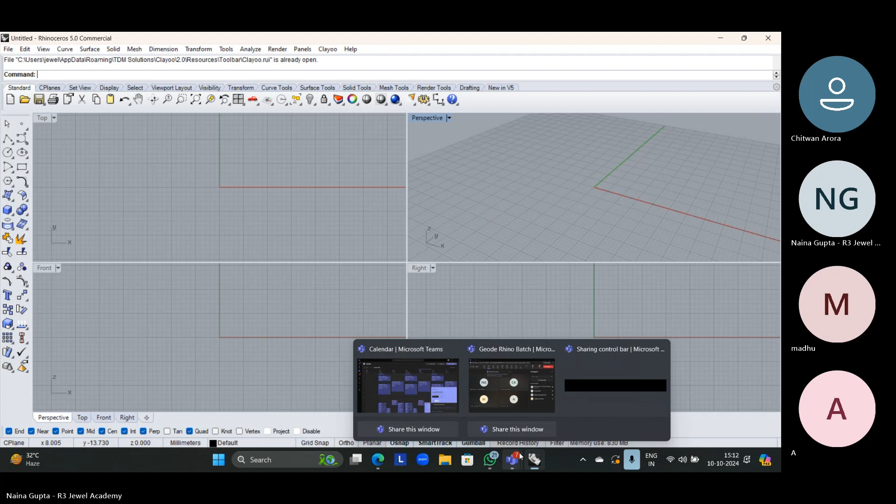Madhu, can you understand English properly or Hindi? Madhu. Hello, hello Madhu, madam. I'm talking to you on phone, can you hear me? Can you see my screen? You can understand English properly? I can teach you either in English or Hindi, so you can understand Hindi or English? Madhu, can you please speak?

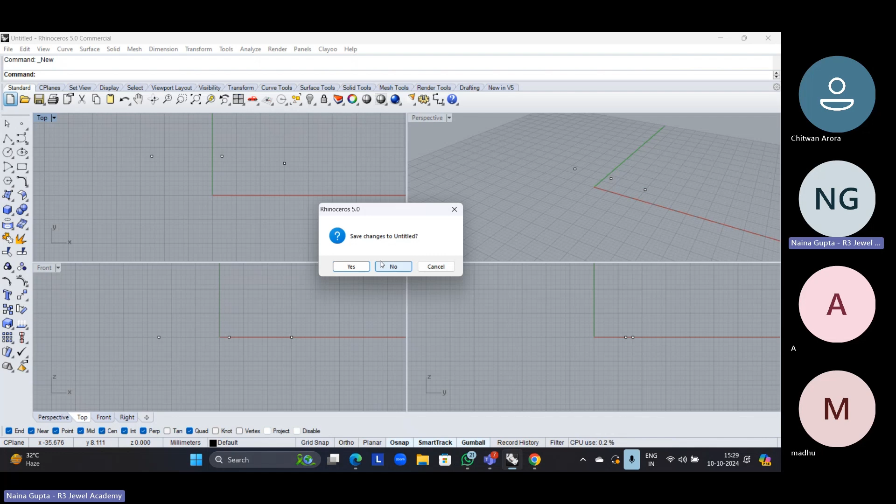But if you click on yes, then it will ask where you want to save this file or what name you want to give it. Suppose I want to save this file on my desktop, then with name 1, 2, 3. Save as type, you don't have to change it. Okay, and save. So now because we clicked on new file, it will open a new file.

So it's asking which unit you want to open. We work only in millimeter, so select millimeter and open.

Clear? Okay, now before when I showed you, there was only 5 boxes in one big box, right? Now this is 10. So when you open a new file from here, it will change, the 5 boxes will change into 10. So how can you change the file?

You can change it if you want, or if you want to use this only, you can use it. But if this is 10 boxes, you have to zoom too much, so what we do, we change it. So how to change to 5 boxes again?

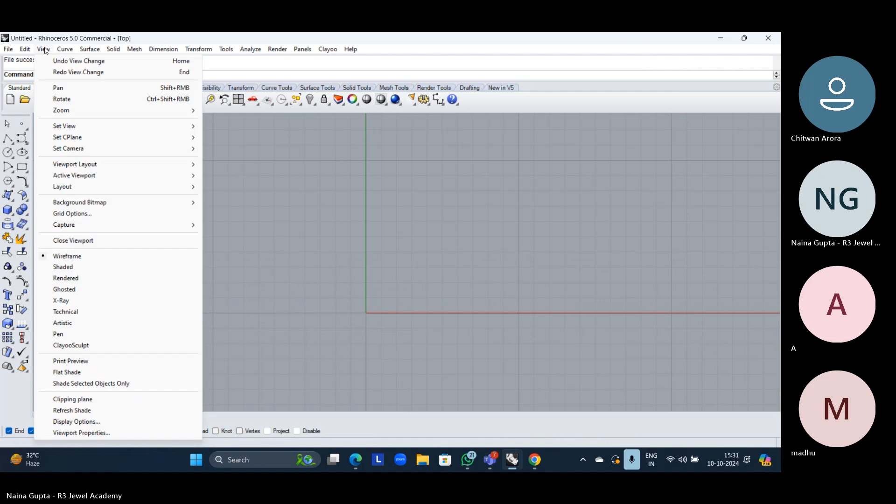Go to view, grid options. So grid options here, you can see major line every is 10, you can change it to 5. Nothing else you have to change other than this, and okay. See, got the 5 boxes? Yes, clear? Yes ma'am.

I'll tell you a few tools, then you have to try it, whether you can do it or not. If you can do it, then we will proceed, or else I'll tell you again.

Okay, now after this new file, we have open. Open meaning if you have saved the previous file or any file before, you can open that. So click here, so it will open. I have saved the previous file with the name 123, so when you open the file here, the present file will be closed and the file you have selected will open. See.

Clear? Madhu, yes, clear? Yes ma'am. So how to open a new file, how to open Rhino software, and how to open a previous file is clear. Yes ma'am. All the 4 views, how to open one single view on your screen, this is clear. Yes, clear.

Okay, now after this we have the save option. So if you are working on this, if you are making a design, you have to save your file after every 3 to 4 steps, because now we are making very small objects or small motifs. When you create your design and if you don't save your file, what will happen? If by any chance the laptop shuts down or for any reason you have not saved your file, then all the designs will go if you have not saved the design. Yes ma'am. Okay, so it's better you save your design.

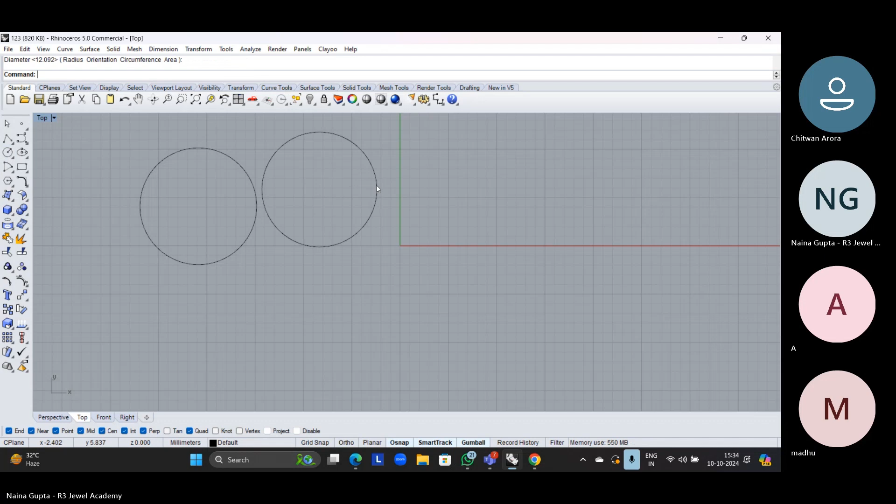Okay ma'am. So now suppose I have created a few circles. Circles you have to create from here, this is circle. If you have created with the measurement, that is okay. If you have created it roughly, you can do that also. So suppose I've created this.

Now the next option is cut. So I'll open one more file, one minute.

Okay, so suppose I want to cut the circles which are merging with one another. So leaving this one, each and every single circle is merging somewhere, so I want to cut this from here. See, when you click on this, now you cannot see all these circles here. So now you want to paste it in the other file, so you have to click here. Then the next option is this one, the yellow one, this is paste. See. Cut and paste is clear. Yes ma'am.

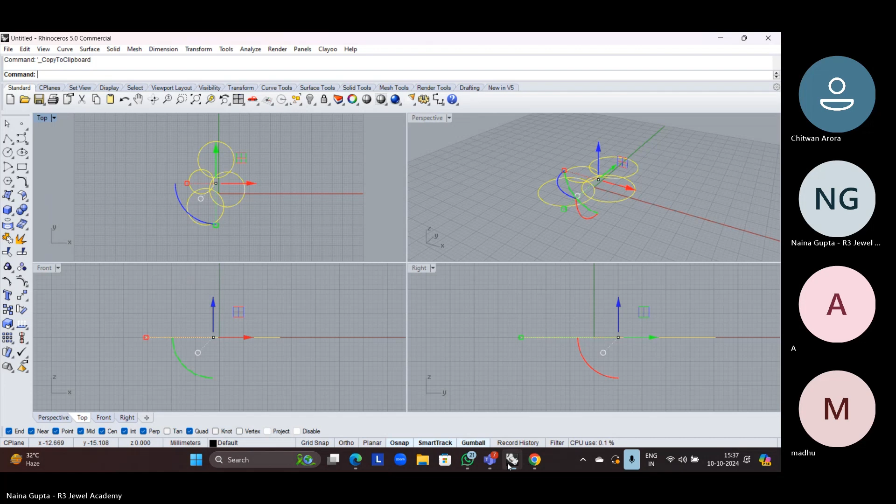So the shortcut key for cut is Control X, like we do in Word. Yes, this Word you use. Control X is for cut, Control V is for paste. And if you want to copy, you can click on this center one, this is copy, you can click here or Control C. And here Control V. So Control X is for cut, Control C is for copy, and Control V is for paste.

Okay, if you want to undo, you have to click on this. See, so we have copied again, so you can undo it. And when you click again, it will be redo. So undo and redo you can click from here, or the shortcut key for undo and redo is Control Z and Control Y. Control Z is undo, Control Y is redo.

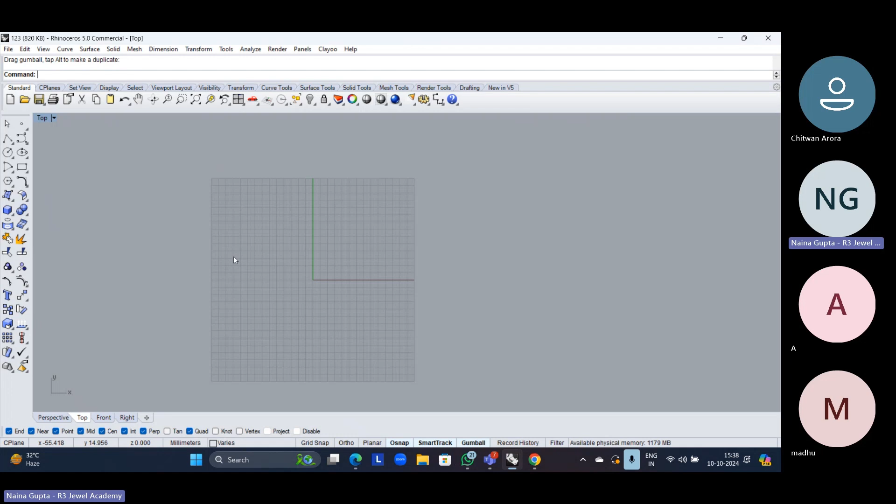Okay, now suppose your design is somewhere here and it's not visible, so now you want to bring that design to the center. So what you will do with the help of this pan view, select this and you can drag it like this on your screen. If you want to reuse your command, you don't have to every time go here and click, right click and you will use your command again. So you can move it till here.

Suppose I want to place this properly here. So this pan view is clear. Anywhere you want to move your screen, you can move it like this. Right click and you will use your command again, because now the command ends. If you want to reuse a command, right click and you can use the pan view again.

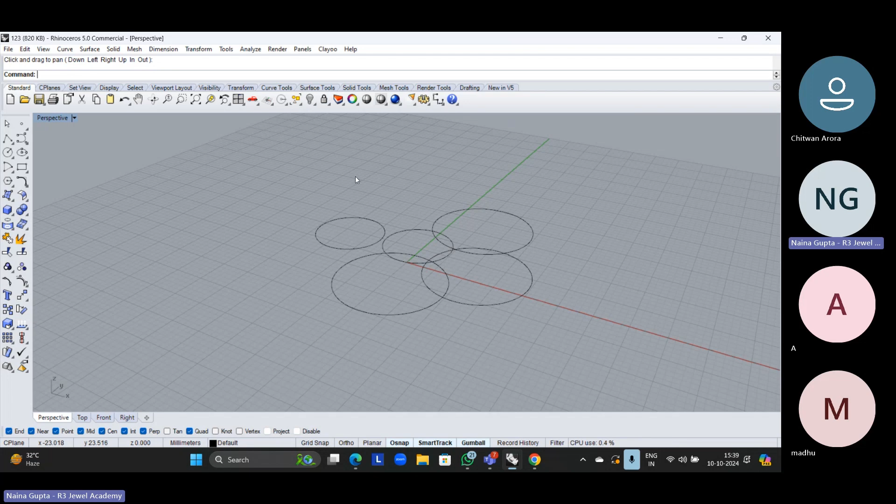Next to this we have rotate view. Rotate view won't work in top view, front view or right view. You'll need this in perspective view, because in perspective view you can rotate 360 degrees, right? So you will click here and you can rotate your view.

If by mistake you have used rotate view here, it is perspective view only. So to set this view back to top view, you have to click on this drop down, set view, top, and you will get the top view back. Now see, whatever you have created in top view, front view and right view, you can see only a straight line.

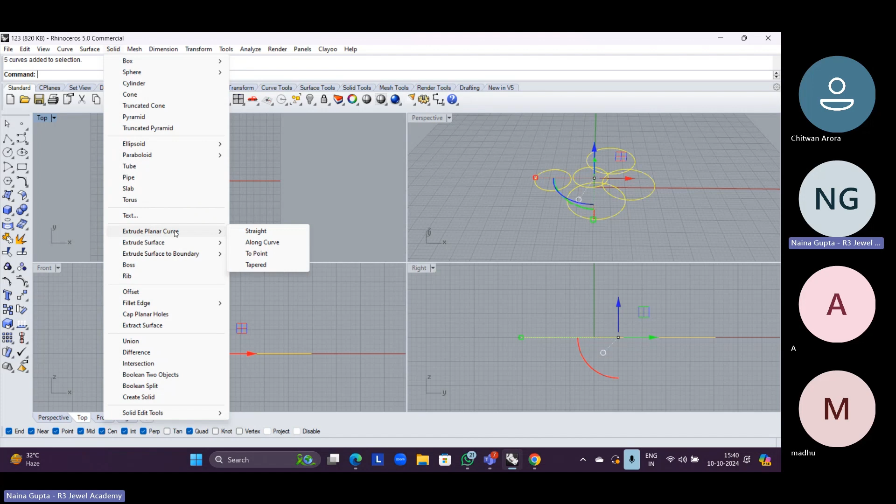So when you give the object 3D, you will create a 3D object, then you can see the thickness in front view and right view. So how to create the 3D object? Select, then go to solid. Then in solid, extrude planar curve, straight.

Now can you see the thickness? Solid should be yes. If you want both sides, then yes, or else no. When you give the thickness of any metal, if it is plain gold and you're creating a design, the minimum thickness of the metal should be 0.5, not less than that.

Anything you create, the minimum thickness of the metal should be 0.5 if it is plain gold. So from 0.5 to 1 you can take it. If you have placed diamonds or any stone, then the minimum thickness of the metal should be 0.8 to 1.2. Maximum you can take 1.5, not more than that.

So I'll take 1, enter. Now see, it's visible but not solid. So what you will do is click on the perspective view, and here this is wire frame, so it is visible as wire. You have to set it to shaded. Now can you see a 3D object?

Any doubt till here? No. Okay, after rotate view we have zoom in, zoom out.

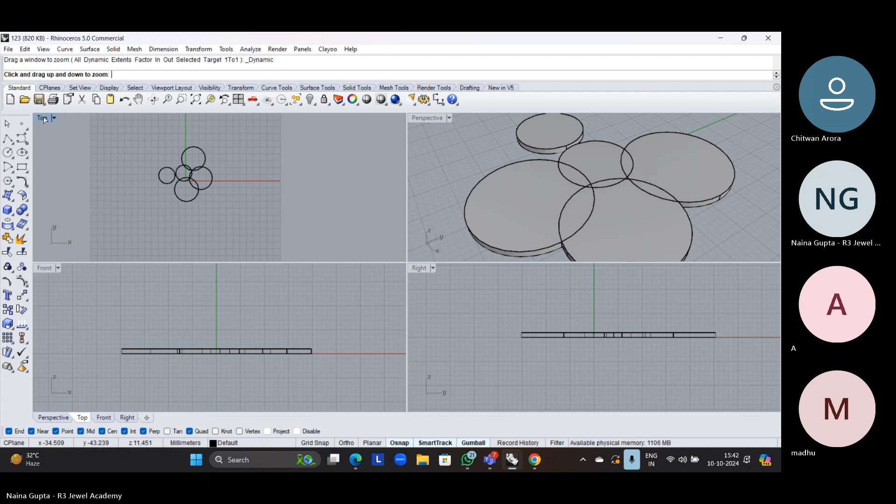When you select this, if you want to zoom in, suppose it's not visible whether this is properly merging here or not. So what you can do is zoom dynamic, and you can zoom it and see it.

Suppose you don't want to zoom too much and you know you have to see the zooming part here, so the next option is zoom window. For a particular place you want to zoom, you can create this rectangle at the place you want, and it will be zoomed. So zoom in, zoom out you can do from here, and zoom window you can do for a particular area.

Okay, so all this is not needed: zoom selected, then undo view change, and then zoom extents, all this is not needed. 4 viewport I have already told you, and this right view is also not needed. Set CPlane origin, not needed.

Now select all. If you want to select all the objects present here, you can drag like this from left to right and select it, or you can click on this and select all. See, all will be selected.

If you want to select some selected objects, suppose this and this - when I'm selecting this one, the other one gets deselected, right? So to select multiple objects, you have to keep pressing shift, and whatever object you want to select, you can select.

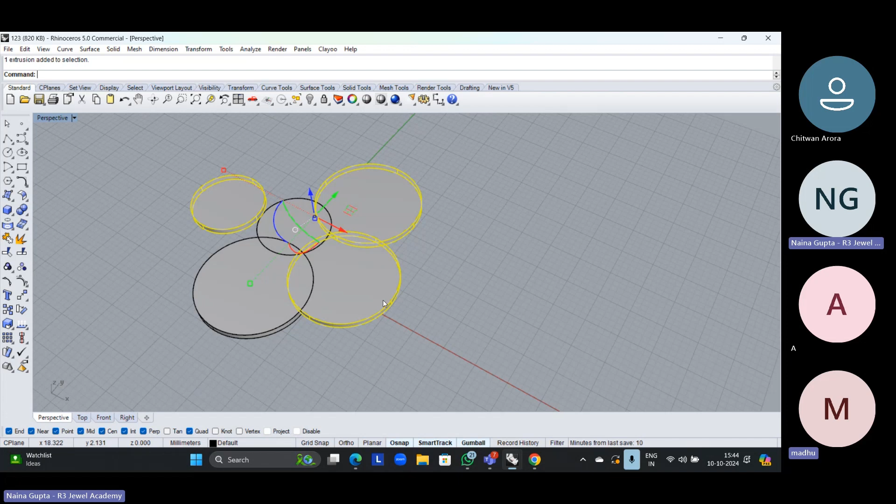Suppose I don't want this one, only this and this I want. So you have to keep pressing control, and whichever one you don't want, you click on that. So to deselect, keep pressing control, and to select multiple objects, keep pressing shift.

Now, after this, we have the option of hide object, show object, lock object, unlock object. So suppose I only want this object, rest I want hidden. What you will do is drag and select, and when you click on hide object, see - easily you can hide the object if it is not needed when you are making the design.

So how to bring that back? Click on this drop down arrow, and the second option is show object.

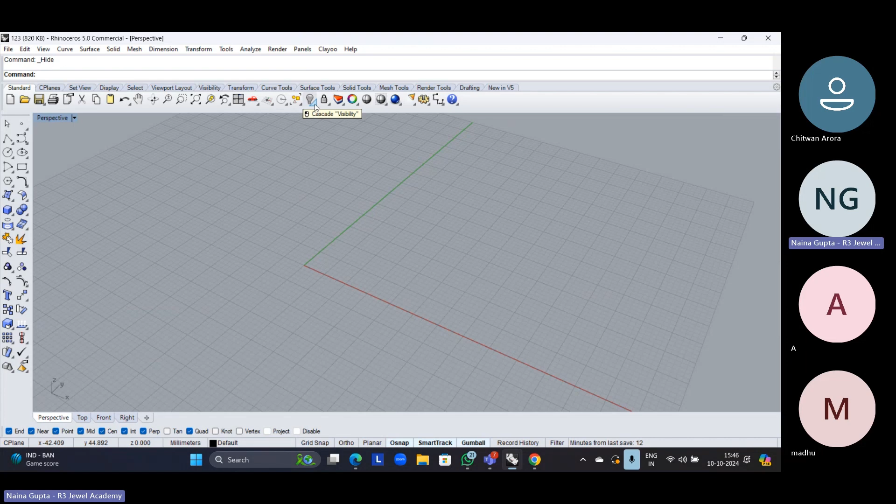Now, if I hide all this, and I want some selected object, click right click, and the third option, show selected object. So now, whatever you have hidden, everything will be seen. What object you want visible, you have to click on that and then press enter. Rest, everything will be hidden, and the object which you have selected will be on the screen. Clear? So show object, hide object, and show selected object is clear.

Now suppose I don't want to work on this, all the 3D object. So what I'll do, you can lock it also. If it is locked, it will be in gray color, and you cannot move, you cannot work on this.

This you can work on. Clear? If it is locked, you cannot move, you cannot work on it.

So next option is to unlock object, you can unlock it. If it is in gray color, meaning it is locked. The third option is unlock selected object, same like show selected object. So now suppose I want only this to be unlocked, select this, rest everything will be locked again.

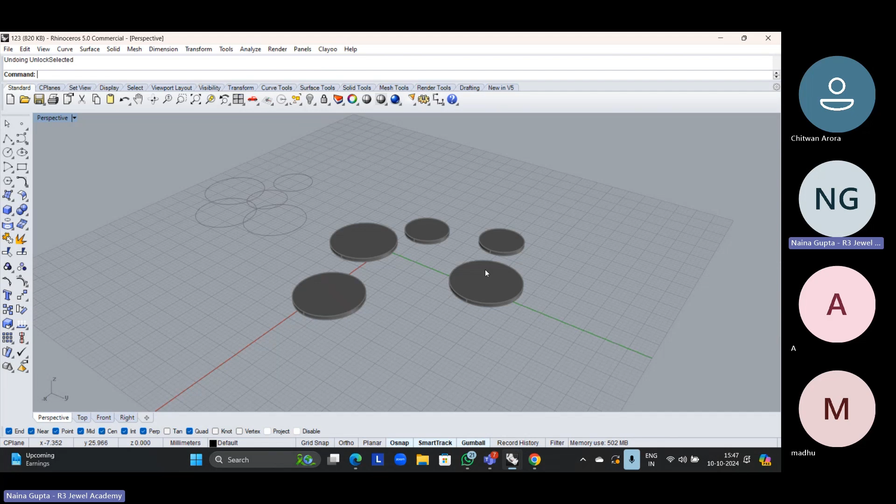So from here, new file, till this lock object, unlock object, show unlock object, unlock selected object - all this is clear?

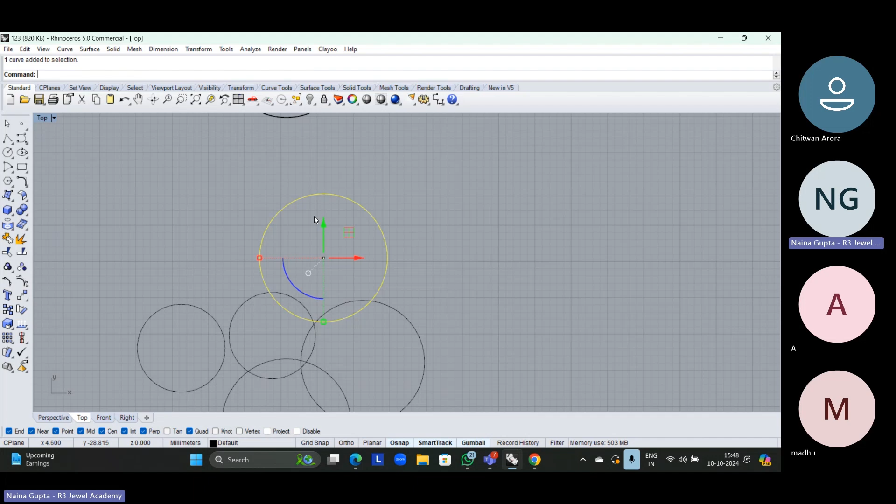So one more command - suppose, because I have not made this with measurement, just manually I created the circle. And if someone is asking you what measurement this circle is, so what you can do, before this question mark, we have linear dimension. Select this, any measurement you can select from here.

See, first point, second point. How are you getting this point? See, 17.63 - how you are getting this point, it's showing this point, how you are getting it? So this you can get with this Osnap. You have to click on this. It should be always on.

And when you have clicked on this, it is in bold color. You have to tick mark all this. You will get all this: end, near, point, mid, center, intersection, perpendicular, tan, quad, everything. So end, near, point, mid, center, intersection, perpendicular, and quad - you have to tick mark all this.

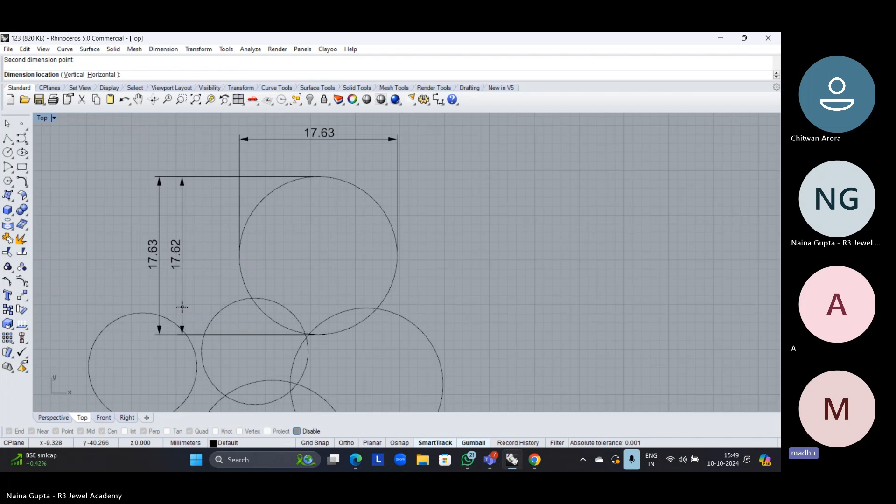Okay, then only when you do the measurement, it will show you. See, if it is off, it will not show you the measure. How will you measure it then? See, if you are doing it with this, now it is different - slightly it is missed. So this should be always on.

And this gumball, this also - Osnap, smart track, and gumball should always be on. Smart track is which helps you to work smartly, so this should be on. You don't have to do anything, just it should be marked on.

And gumball, if it is off, see, if I tell you I want to move this straight, is it going straight? No. So if gumball is on, you will get the arrow. Can you see the arrow now? If gumball is on, it's white color. See, now you can move it properly, straight with this gumball.

Suppose I want to move this 20mm up. So you can just click on this green arrow, take it up 20. A box will open, you have to write 20 and enter. See, it moved to 20 up.

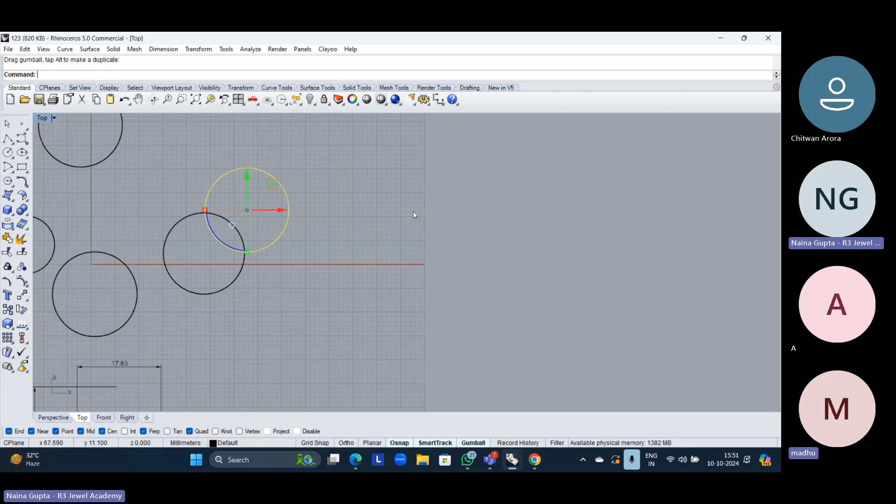Suppose I want this left side. So the arrow is going right side, and if you want left side, then what you will do? Minus - yes, very good, minus 20, enter. See, clear?

Now, if you want to change the shape, suppose it's placed here and it's not touching. So what you can do - you can change the shape and see like this. According to the design, if it is needed, you can use this small green and red ball, this box, to do it. See like this. Okay, not only this, if it is rectangle, you can draw it from here.

Suppose I want to connect here. So what you can do - first, rotate this. Now, according to this, I want to reduce this, and we can move it like, see. Clear?

If you want to rotate and you have the degree for how much you want to rotate, use this green-blue arc, click here. Suppose I want to rotate 45 degrees, so in the box you have to write 45 and enter.

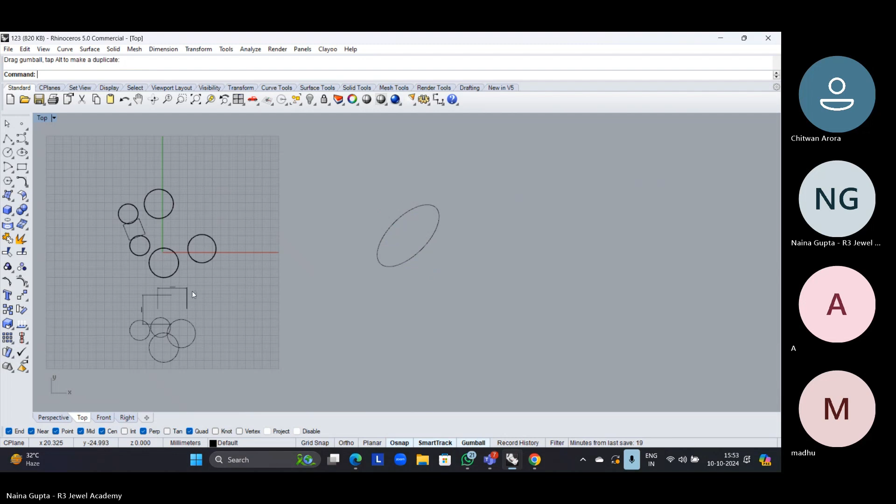Clear? After this, one more thing, and then you have to practice and see whether you can do it properly or not. So we have the option of layers.

Click on this layer. The first option is new layer. How many layers you want to create? You have to click here and see - layer 1, 2, 3, 4. However many times you click, you will get that many layers.

So what is the use of layer here? Suppose all these circles I want to keep in layer 1. Select all, and in layer 1 you have to right click, change object layer. Now you can lock it and hide it from here.

It's not moving because I have locked this. If you want, you can change the name here - click here and name it circle. You can change the name so that if so many objects or motifs are there, you can remember which layer you have saved what in.

If you want to change the color, click on this black box and choose whatever color you want. Suppose I want red, okay. Because we have changed the color, a layer of this. Now all these solid objects I want in layer 2 - change object layer.

Now this I want gold. Now this oval I want to keep in layer 3, dark green, and this oval. Now this one, layer 4.

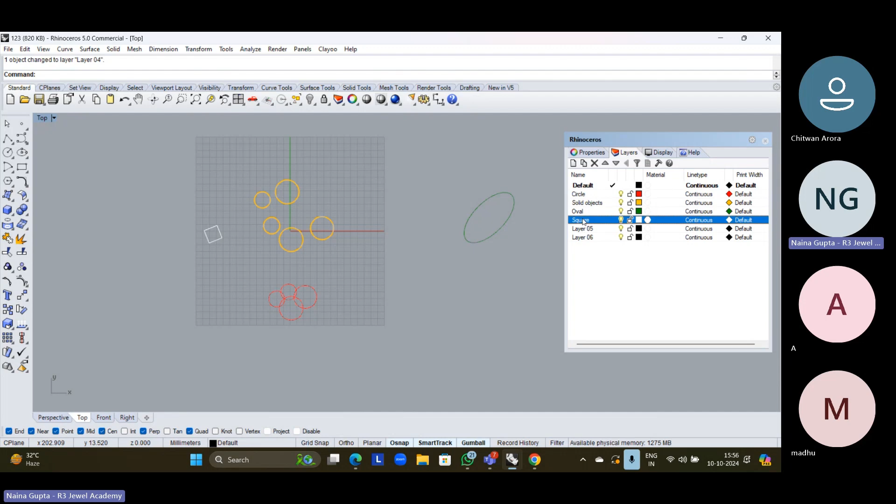Now if you want to delete anything, a sub layer, select which one you want and delete. Suppose this square - if you select it by mistake and press delete, it will ask whether you want to delete this or not. If you press yes, then only it will be deleted. See, that layer is deleted.

Now, how to bring the picture? Using picture frame, you can bring any picture which you have downloaded or the customer has shared with you. You can select that picture and, using picture frame, select the picture, suppose this one, and open.

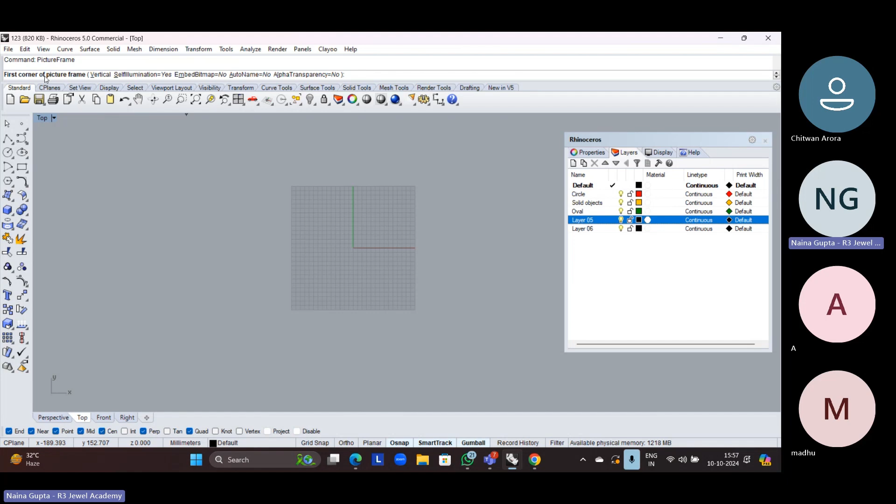Now it's asking for the first corner of the picture frame, so you have to decide. First corner, make it straight, and second corner. To make it straight we have the shortcut key - press shift. If you press shift, it will be straight. So now you got the picture here.

So now if you want to keep this picture in a layer, so that every time you don't have to go inside to hide and unhide, what you can do is put it in layer 5, change object layer. Now this picture is in that layer. You can lock it from here and start making the design.

So now try it from this new tool to this linear dimension. Try it and let me know whether you have understood or not, then we will go further. If any doubt, you can ask.

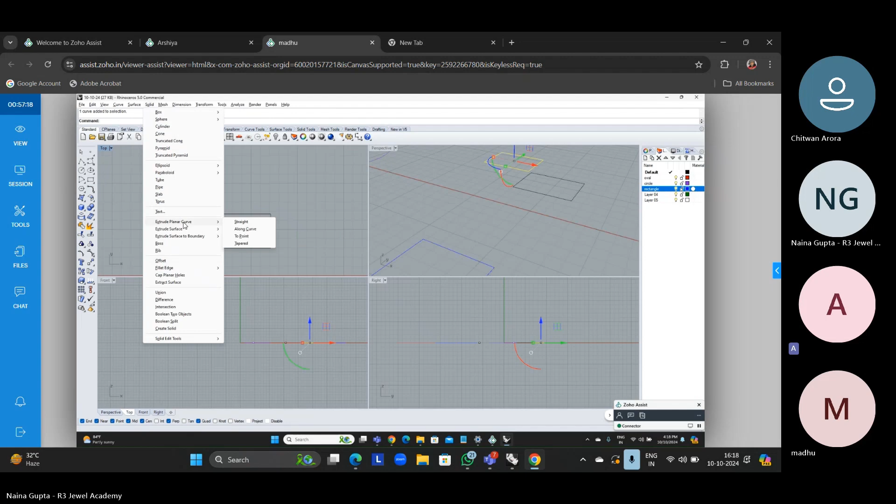See, one, enter. Here, try it once here. You have created in one place thrice. You have to create only one curve, only one object. Make this solid.

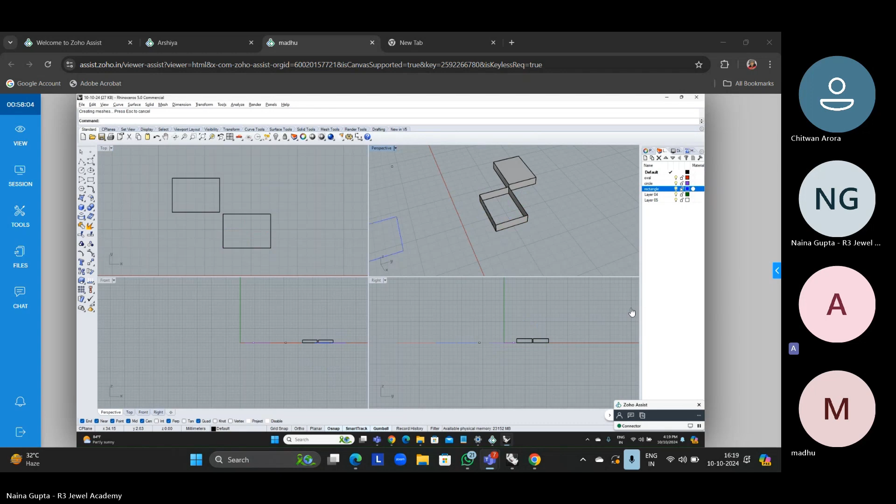Do again what you are doing. Select this, go to solid. Extrude planar curve straight. Yes. Now, one, enter. See, you were creating extrude curve, so it was only creating surface. Okay, clear?

Now bring the picture, I have shared one picture, one minute. I'll share you one design. One minute.

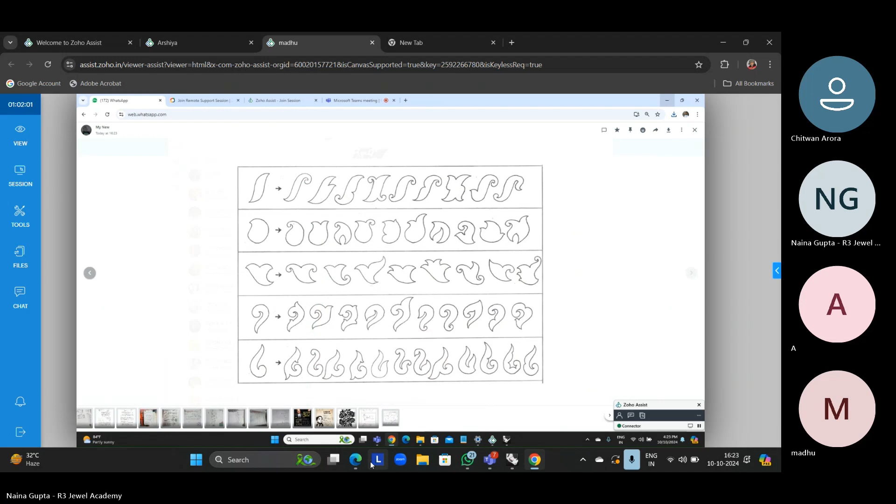Okay, so download the two pictures which I've shared just now. Yes, first download this. Picture frame. Not in front view, in top view, you have to bring it. One minute, one minute, one minute.

Picture frame, then you have to select this, open first corner of picture frame. So you have to decide from where you want to select. Slightly make it, place it bigger, like this. So not this one.

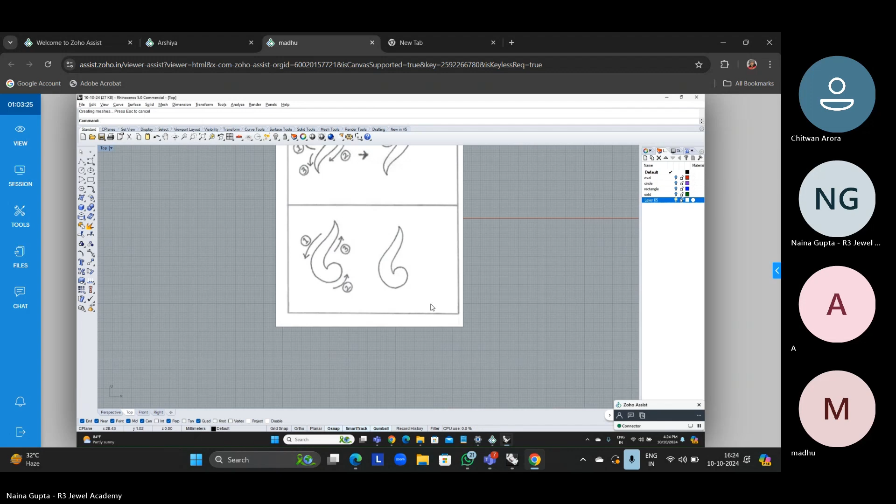Okay, now we have the option of making the curve. So to make this curve, you have to select this one. In this curve, don't select the first one. If you will select the first one, control point curve, see what will happen. The point will go somewhere else. See, the lines, the curves are going somewhere else. So it won't be proper.

So always when you are making the curve, the design, you have to select the second one, curve interpolate point, this one. So it's given from where you have to start. So you have to start it from here. And slowly you have to make it like this. Small points you have to make and place it over here.

Suppose you have done a mistake here, so you can press undo, and then you can do it again. You can zoom it and you can make it till here. And to end this, right click, the command will end. Now again, start it from here or here, anywhere. From anywhere you can start. So start it from here. It's showing the end like this.

Till here, then to end the command, right click. Now I'm keeping this picture in layer 5, change object layer, and I'll hide it from here.

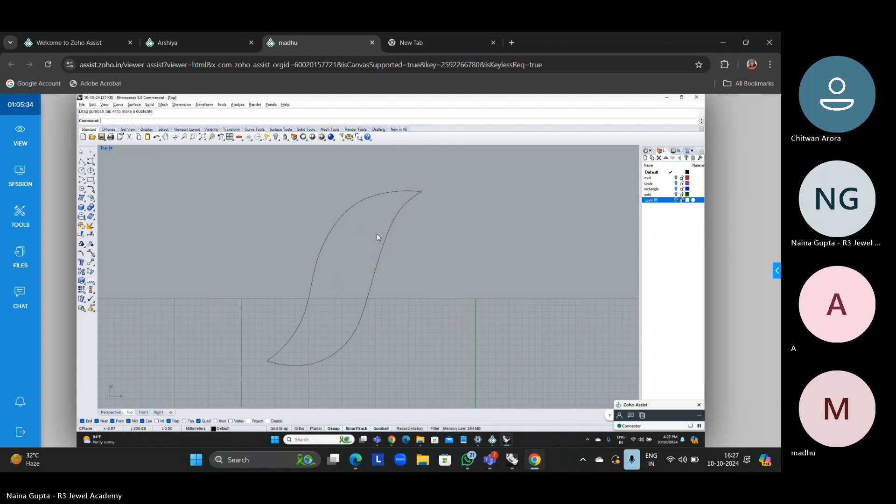If the curve is proper, then it is okay. If it's not proper, you can use edit points or points on, and you can edit the point and make it proper. Or to make this smooth, we have one more option, rebuild. To make the curve smooth, you can use rebuild command.

How many points? See the black line, that's the correction, and the yellow line is what you have made. So suppose 8, and okay, see. If the curve is not smooth, you can use this and make the curve smooth.

Now you have to make this a close curve. To make this close curve, you have to click on join. This puzzle icon is join. It's written in the command, two curves join into one close curve. It is one close curve now.

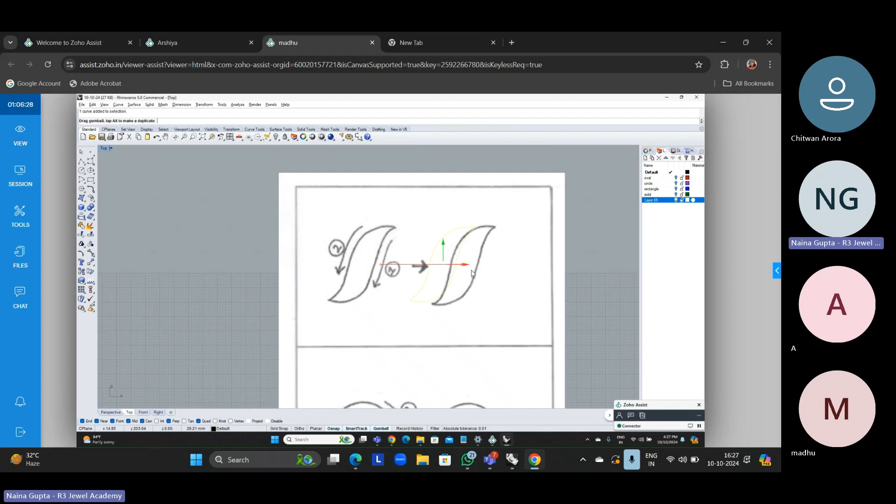Now try this, I'm moving this here. Try this and show me. Now move the page up like this. See.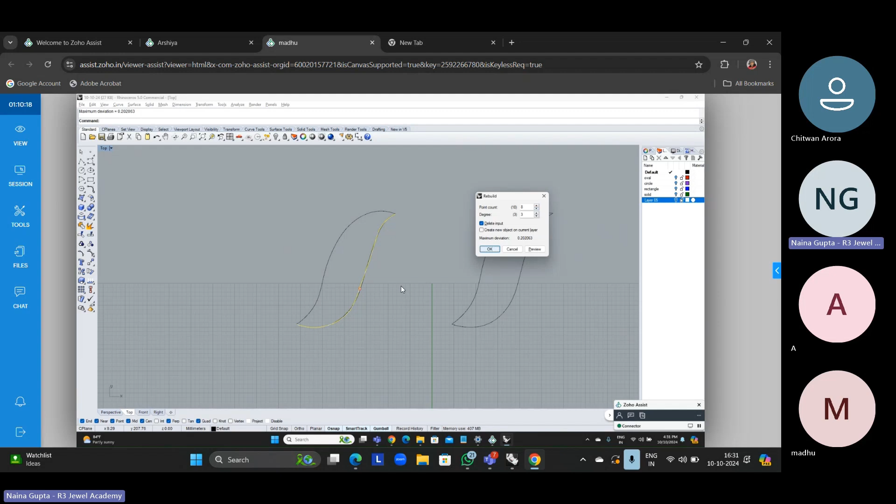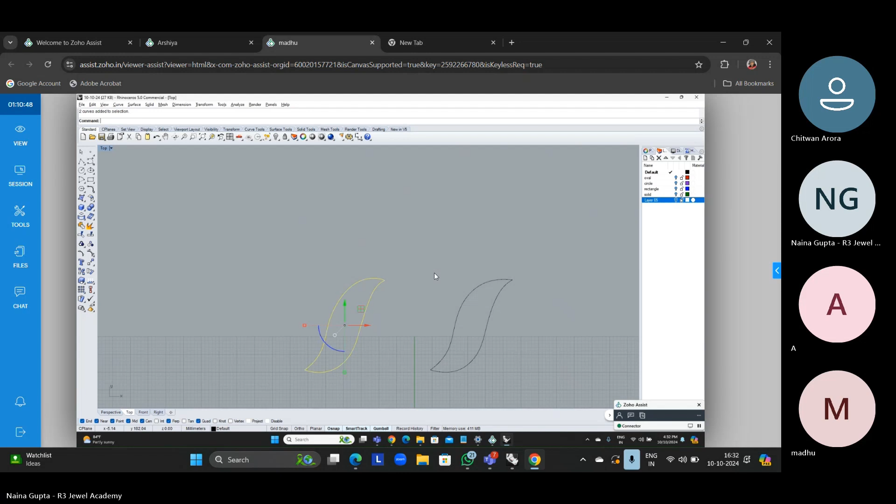Press OK. Yes, now select the second one, only the second one. Okay, now select both and you have to join this. Select, yes, join. Okay, clear? Okay, now try for this one.

See now what happened? Now what happened? It's rounded. I don't want rounded, I want it pointed like this. So what you will do?

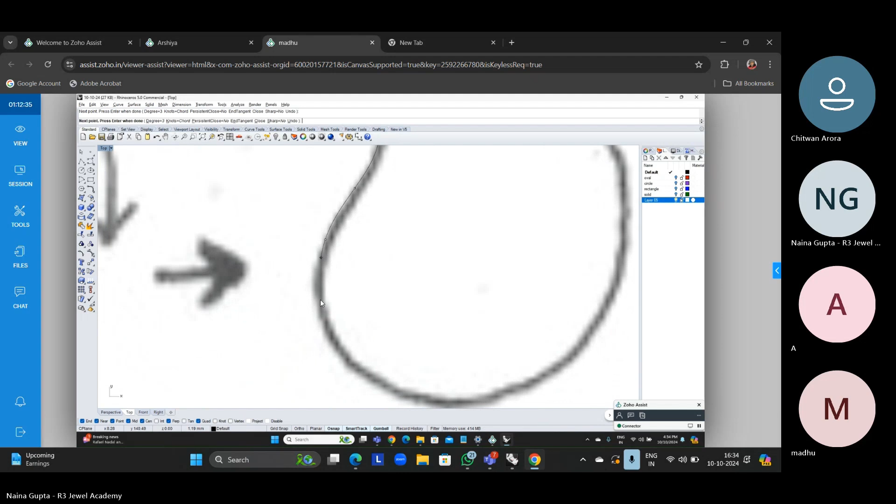Again, select this, okay, start it from here. See, if you will merge this, it will be rounded. I don't want rounded, so you have to

intersect this like this, and now what you will do? We have two options: one option is trim command and the other option is split command. So if you are using trim command, let me hide this. See, if you are using trim command, next to join this, below this we have trim command.

Select this, if you are using trim command, it should be selected. Select object, always read the command: select object to trim. So see, now one part is deleted. If you will again select this, what will happen? The entire design got deleted.

So you have to deselect, again click, right click, you will get the command again and you will click, then you will easily do the trim command. One option is this, the second option is...

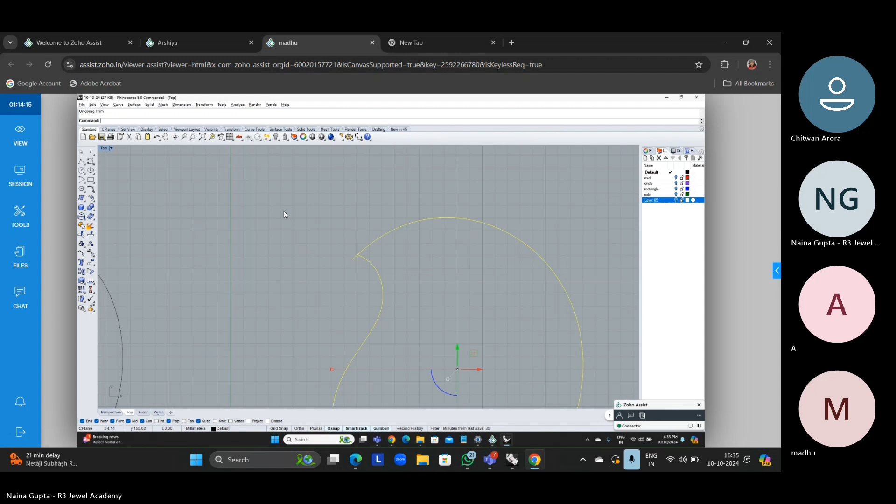Yes, the second option is split command. So how does split work? We have to create one line. Line is from here, create one line, like this.

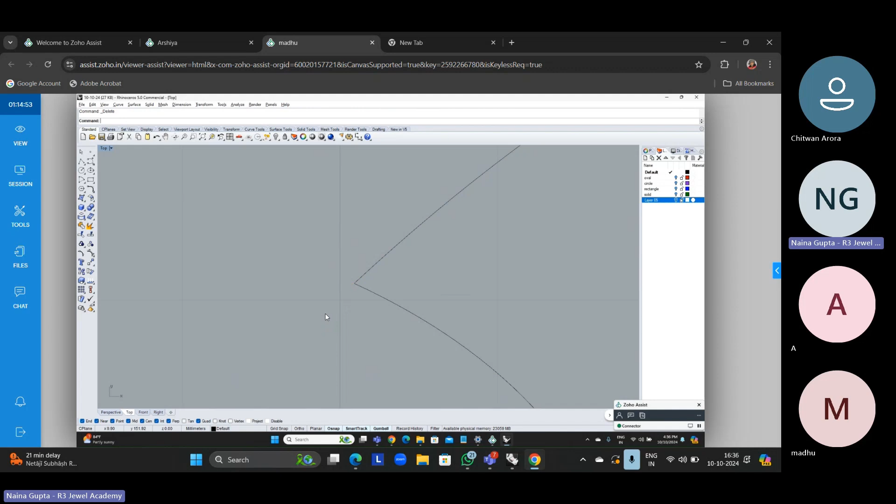Now select the object. Select the cutting object, this line is my cutting object. Select, press enter when done. So press enter, so now one curve split into 3 pieces. Now see, you can select this and delete and you got a pointed area. Clear?

And if it is pointed, you will never use rebuild command. If it is pointed and you use rebuild command, see, it will be rounded, it won't be pointed anymore. Clear? Madhu, clear? So make this and show me this one.

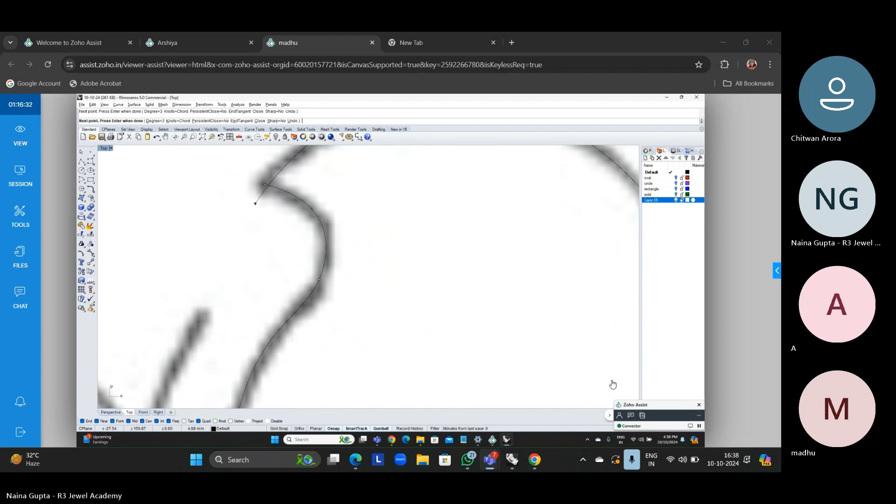Good, yes, end it, end it. Yes, now you can use either trim command or you can hide the object, the picture, hide it. Yes.

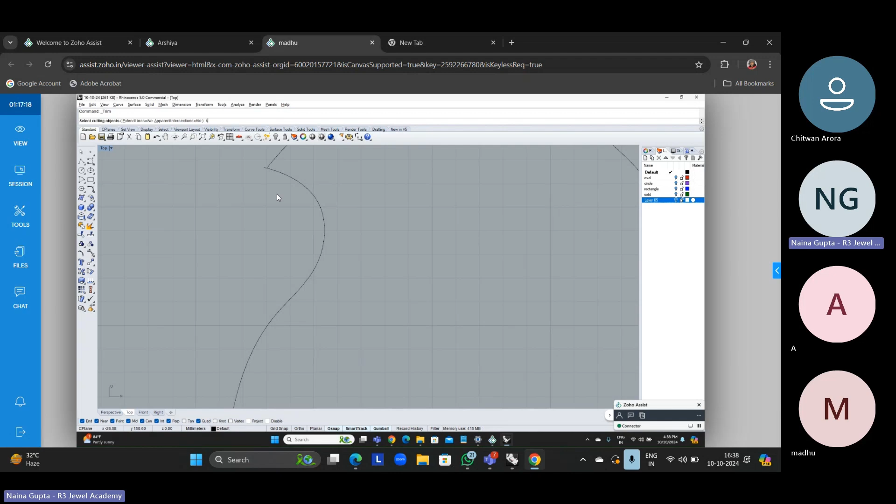End the command again, end the command. Yes, press escape, the command will end. Again right click, you will get the command back, then click here. Click here. Yes, now click here.

So clear, now show me how you will do split command. And this curve is slightly not proper, so don't use rebuild command here. Use points on or edit point, and this point, see, like this you can make it proper.

How to end the points? You have to press escape on your keyboard, top left you have the ESC button, you have to press that and the points will go. Now how you will use split command? Show me.

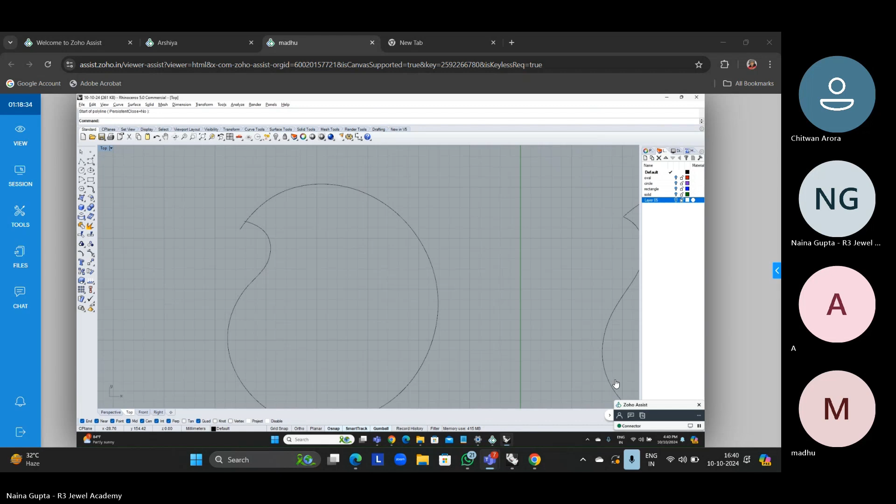End that command, press escape. Yes, now click on split, next to trim we have split.

Yes, not this, yes, now it's asking select cutting object, this line is our cutting object. Yes, press enter. Yes, now select all the 3, this, press shift and select.

You can delete one by one. If it is not selecting, delete one by one. Yes, clear? So this is join, but you don't need to join it. This is already one closed curve.

Now how will you make this? You can make this with the curve or we have the arc option here. Easily you can create it with the arc. The second option, arc - select first point, second point, and see like this.

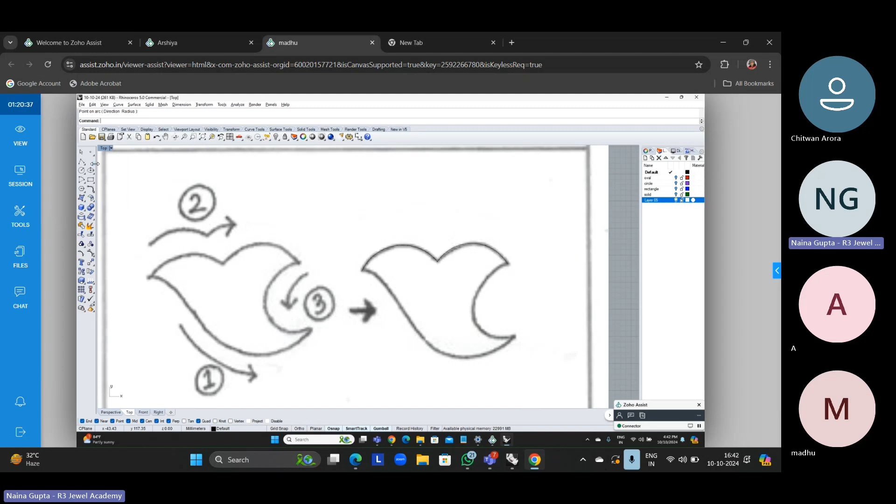Till where you want, you have to make it. Then again, first point, second point, like this. Where there is an arc, only then you can use this option. Here you cannot use it, so here you have to work with interpolate point only. Start it from here.

The shape, you have to make it proper. It's a hand drawing. If it is not proper, you have to create it properly, and end it over here. Then again, start it from here.

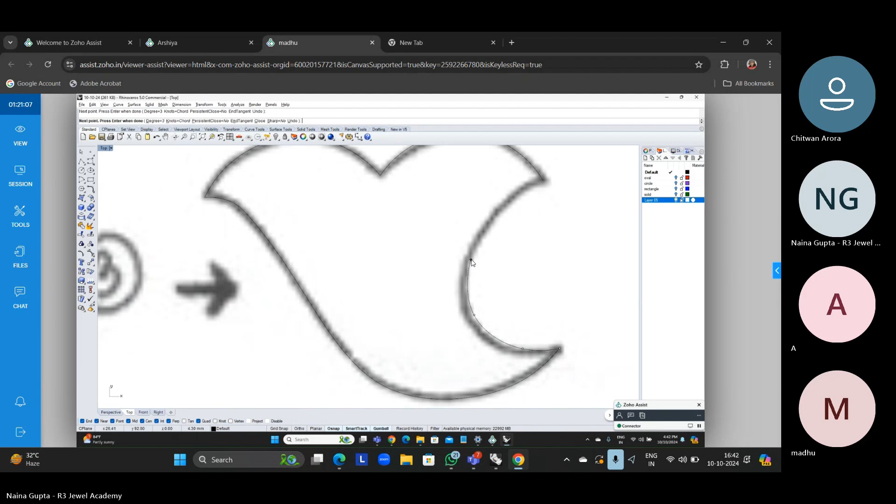Like this, then you have to select this and join. Now show me, make it here and show me. The second one, yes. Good, yes.

Arc only. If you want to reuse the command, right click - you will get the command back. You don't have to select it again, just click. Yes, now select the curve, interpolate point. Yes.

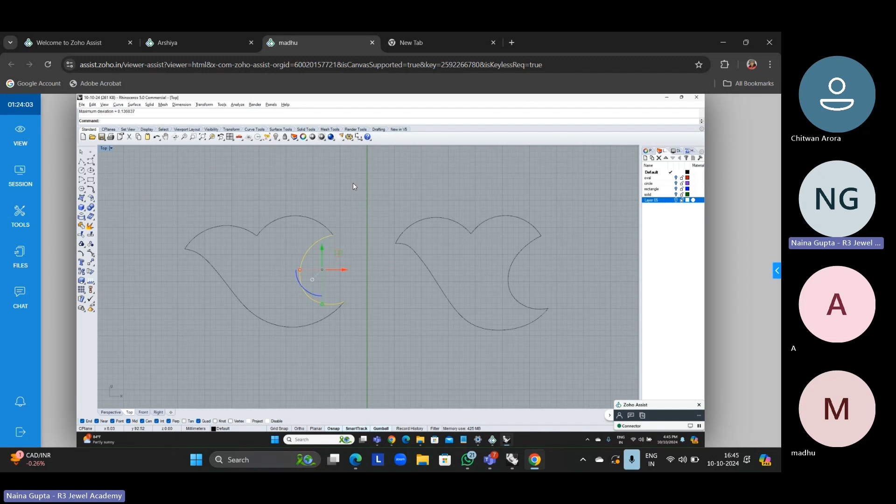Now see, this curve is not proper. Use the rebuild command. Reduce the points, reduce the point from here. See, now this is proper. So you have to see how many points you will take to make it proper. See, now join it.

Yes. Now this one - this and this, you have to show me how you will do it.

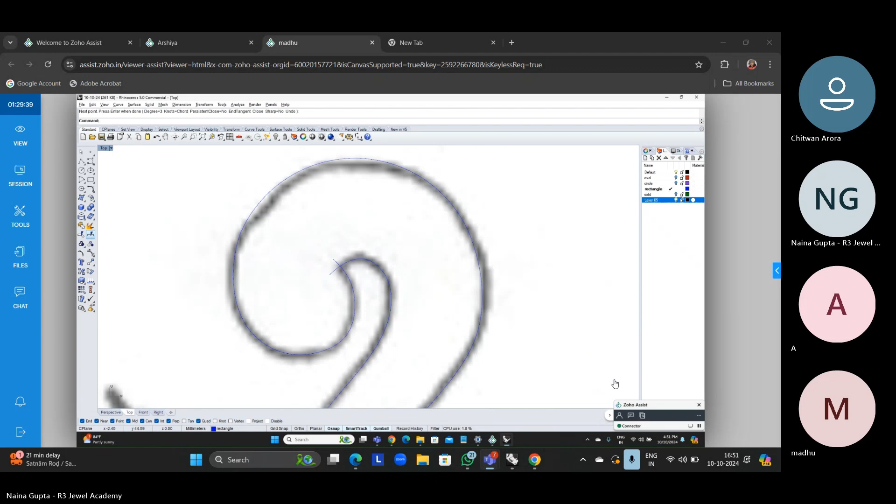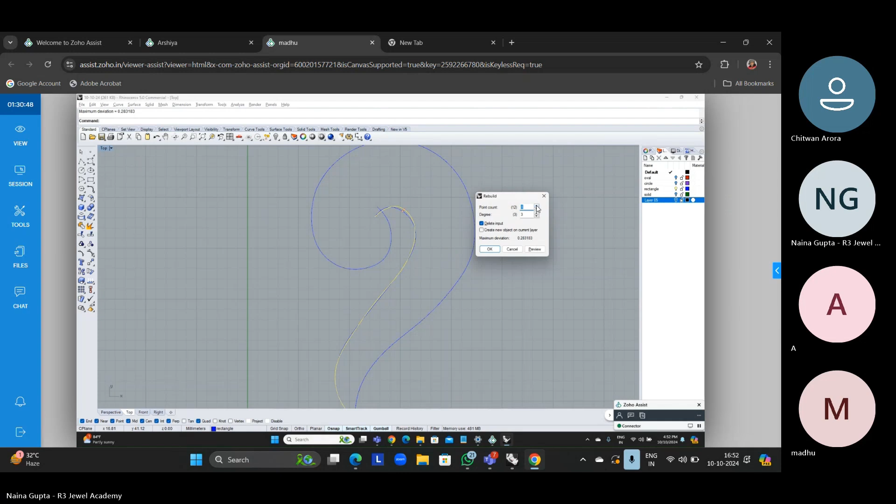Undo it. Join. Rebuild - increase the point, this is not coming proper. 8 is okay, 8, 9. You have to see, slightly if it's still not proper, then you can turn points on and make it proper.

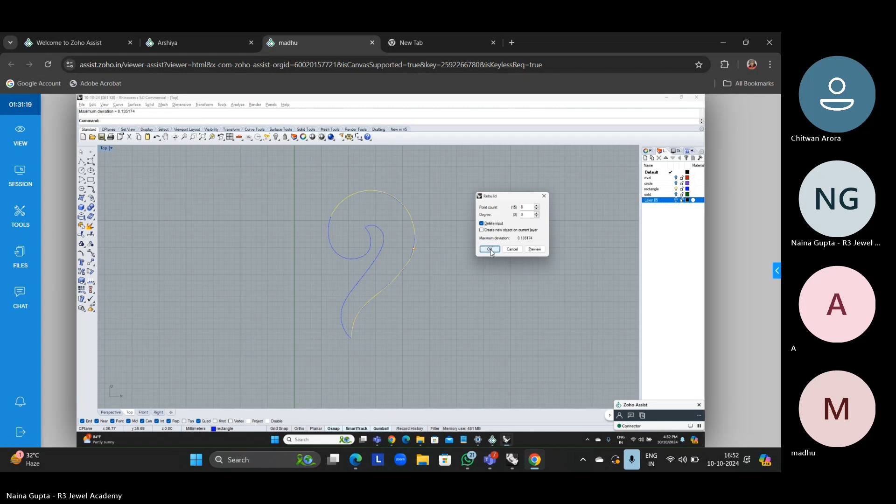Now select this, trim. Rebuild. Select this, this, and join. Clear? Now make this.

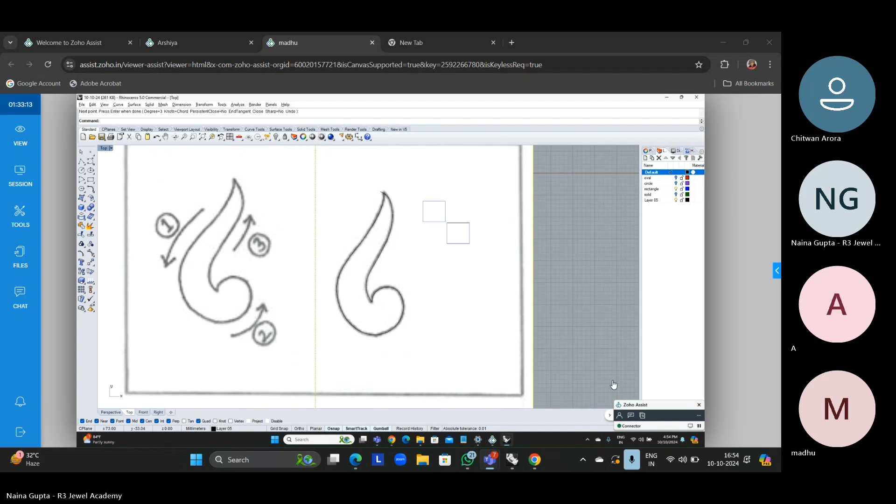One minute, why do you need to make it like this? If it is coming rounded, then you have to do it, or else no, you don't have to. So first, this is not proper, use rebuild. Now because you have done it, use it, but it's not needed here. And join.

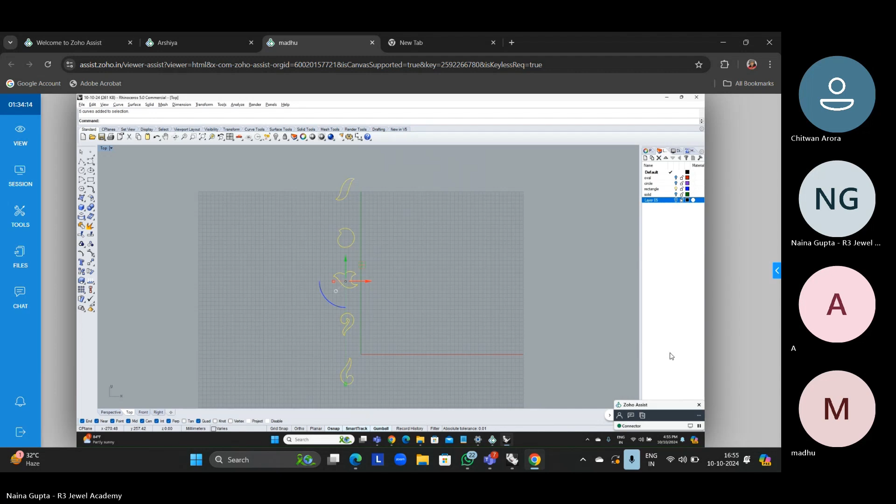Now create this solid. Select all together, yes. Come to the 4 view - in top view it won't be visible, come to all 4 view. Yes, now go to solid, extrude planar curve straight, 1, enter.

Yes, so this is clear and very good, you have done it correctly. So click the picture of this and share it in the group. Homework for you is to complete this one - here the curve is not proper, but when you make it, you have to make it proper. You cannot make it like this, it's a hand drawing, so here it's not proper - you have to make it proper.

Okay, Madhu? And click the picture of this and share it.